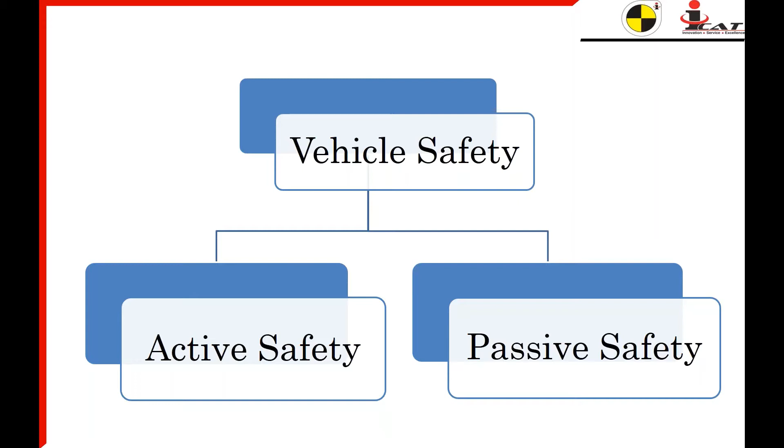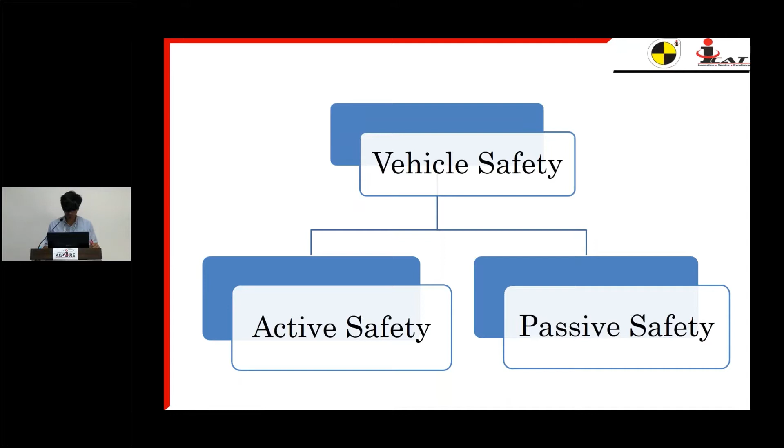Vehicle safety is a term we hear very often nowadays. What is vehicle safety? Anything which helps in increasing the safety of the vehicle or the occupant on road comes under vehicle safety. Vehicle safety can be broadly classified into two main groups: active safety and passive safety.

Active safety, as the name suggests, is anything which plays a role in avoiding the crash, avoiding the fatality to the occupant. So active safety technology prevents the vehicle from going into a crash scenario.

Active safety can further be classified into two parts: one category provides warning to the driver, and the other assists the driver.

Under providing warning to the driver, active safety features give information in the form of signals and warnings about the running vehicle status. A major technology developed and available in today's vehicles is TPMS, tire pressure monitoring system. It equips the driver about the current status of the tire, and in case of a flat, it cautions the driver to park the vehicle and do the necessary change.

Lane departure warning system is also a very important feature in today's vehicles, in which it warns the driver about any deviation in the lane the vehicle is traveling in.

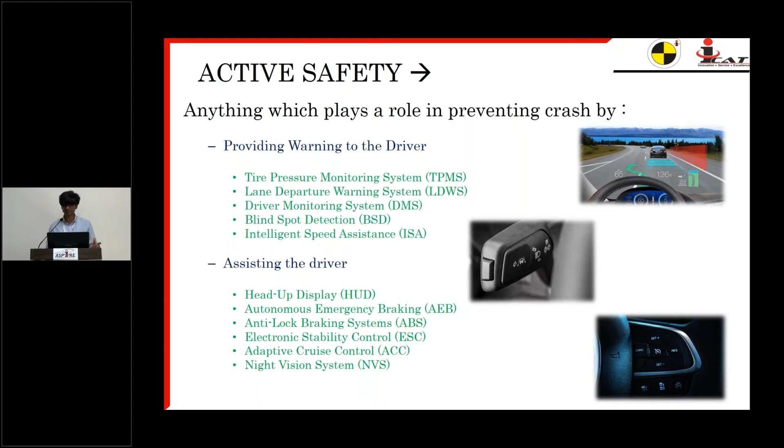Now, the other safety group we will focus on today is passive safety. Every system has its accuracy limits, so in case there is a crash and a casualty to the driver, there should be some system to avoid injuries, to minimize the injury or death. All those equipments and technologies which work in this direction come under passive safety.

Passive safety can also be divided into two parts: one which safeguards the vehicle occupants, the people sitting inside the vehicle, and the other the people outside the vehicle, the vulnerable road users, the pedestrians.

Under vehicle occupants, there are primarily four major technologies being used, namely airbags, seat belts, whiplash protection system, which helps in reducing neck injuries and whiplash injuries in the driver, and child safety systems. We are going to discuss this in detail in the following slides.

Under pedestrian safety, there are certain technologies available like pop-up bonnets and windshield airbags, which minimize the injuries caused to pedestrians.

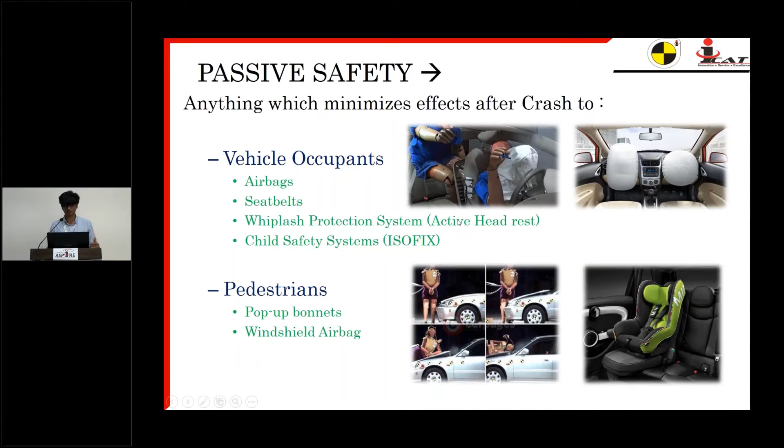The major elements of passive safety can be divided into the front and rear crumple zone, the main occupant cavity structure, airbags, front and rear seat belts, side impact bars which are useful in side crashes, and collapsible steering wheel.

Coming to the crumple zone. What is crumple zone? Earlier, the general perception of people was that the heavier and more rigid the car is, the safer it will be. But this is something which goes opposite in passive safety.

During a crash there is an impulse force which acts on the vehicle, and there is kinetic energy. The more the vehicle is able to dissipate the energy, the better the car will be. To dissipate the energy, physics says there should be more deformation and absorption of energy. The lesser the energy gets transferred to the occupant, the driver, the better the vehicle is in minimizing casualty. The structure which plays an important role in this is the front structure, the structure forward of the windshield, the firewall, and the bumper.

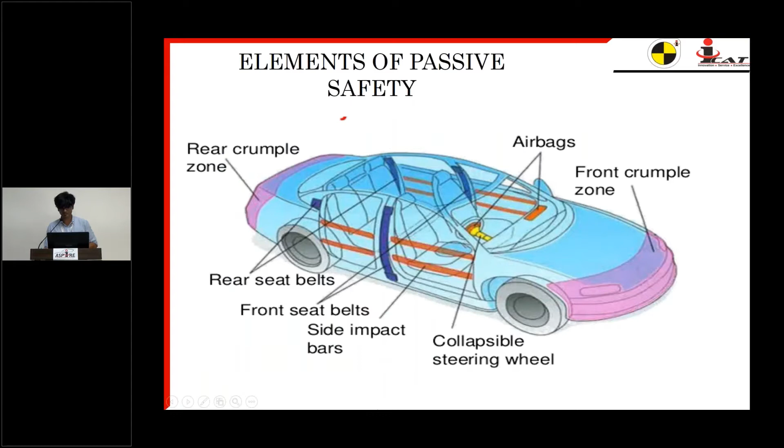Airbags, everyone of us have heard about airbags. Airbags are basically air cushions which come into picture during a crash. Airbags are also known as secondary restraint system. You must have seen in the vehicle there is generally an inscribed word on the dashboard as SRS. This SRS is nothing but secondary restraint system.

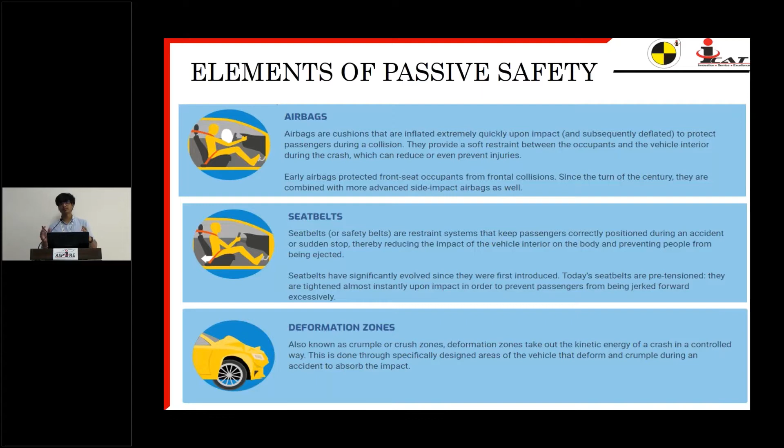Why is it secondary restraint system? Because this is generally not in direct contact with the occupant, whereas the seat belts are called primary restraint system because they are in direct contact with the occupant and control the motion of the occupant during the crash.

Let's go further into detail. There are different types of safety belts. Today I am only going to discuss the most common safety belts being used in the vehicle and the emerging technologies that are coming up in safety belts nowadays to prevent major injuries to the driver.

In today's vehicle, two types of belts are generally used. One is the 2-point belt, also known as lap belt, generally seen at the rear seat center occupant. This kind of belt restrains the driver only through the lower extremities, while the upper body of the occupant is still free under motion, so it has very minimal performance in avoiding injuries during a crash.

Another type of seat belt majorly used in today's vehicle is the 3-point safety belt. Coming to the technologies developed over the years in 3-point belts, there is the 3-point ELR, known as emergency locking retractor, which is the basic seat belt present in any vehicle or car.

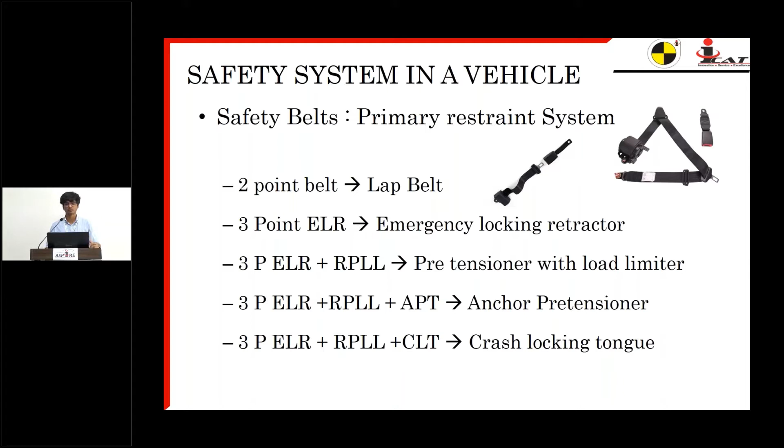Recently there was another development in seatbelt technology, CLT, crash locking tongue. So with ELR, load limiter, pre-tensioner, there is another component added in the tongue, which basically during the crash locks the webbing to prevent slip. So there is more efficient restraint of the occupant.

Coming to the airbags. As you know, currently in India, driver and passenger airbags have been made mandatory by the government, and every vehicle now being sold in India will have at least driver and passenger airbag. Other than these, there are different types of airbags which are available in the vehicle.

As you can see, a curtain airbag. This airbag generally helps to protect against injuries during a rollover or a sideways crash. It's basically located on the roof rail of the vehicle, and in case of a vehicle turnover, it protects the occupants and minimizes injuries.

Another type of airbag is the side airbag, also known as seat airbag or pelvic airbag. This airbag is generally located between the B pillar, the door, and the seat. During a side crash scenario, when the vehicle hits the car from the side, this airbag deploys and minimizes the forces being transferred from the door to the occupant's pelvis.

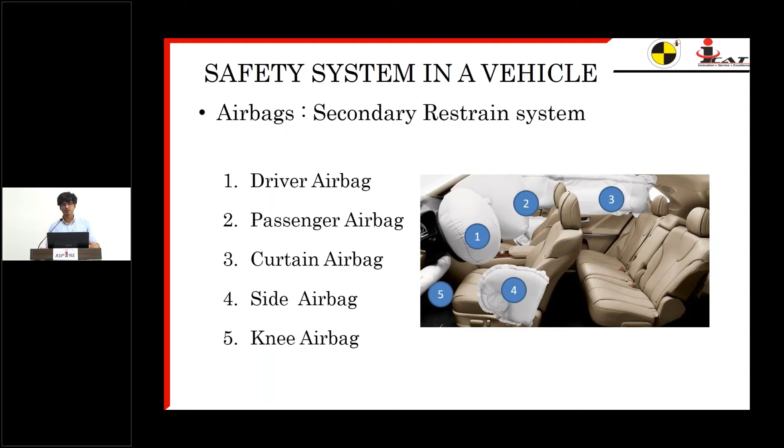Another one is the knee airbag. This airbag is generally used in frontal crashes when the occupant's legs hit the dashboard or the steering wheel, causing a certain amount of injuries. So this airbag basically prevents those injuries.

So now, having discussed the major elements of passive safety, what is the objective of the crash test basically? Why do we do crash tests? Crash tests are generally done, first of all, of course, to make a safe product, a safe vehicle, and for injury reduction.

There has been a constant series of crash tests done on vehicles to come up with new, better designs, better ideas, and ways to minimize injuries. Performance rating: you all must have seen nowadays there has been talk about vehicle star ratings, 1 star, 2 star, 5 star. All those performance ratings are done based on crash tests performed inside the lab, and of course benchmarking. Different OEMs perform crash tests to see where their vehicle stands in terms of crash worthiness, and how they can compete with other existing vehicles.

A crash test is done inside a lab within a controlled environment to simulate on-road conditions. Since everything is controlled and inside a lab, test results are more repeatable, so you can validate your design in a better way.

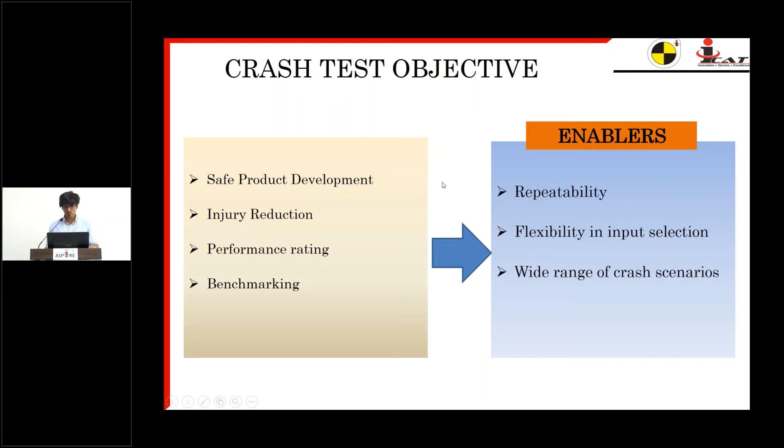Now coming to the crash test facility. Before going further, I would like to show you some crash test videos so that you can relate to the crash test facility more closely.

Can you help me with the video?

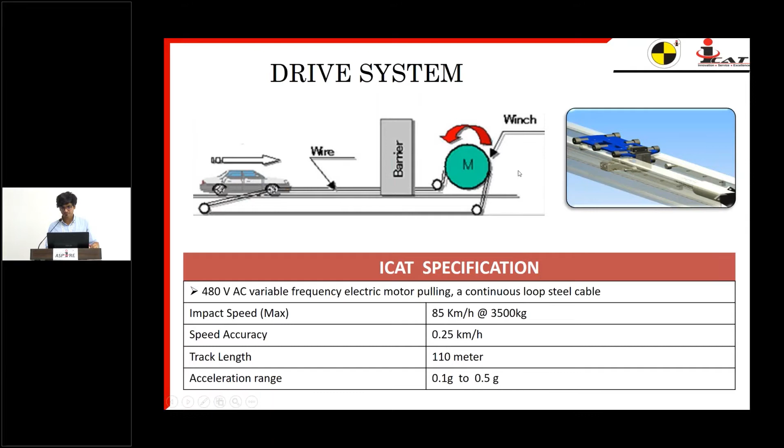Coming on to the second element, the crash barrier.

Barriers are a very important part of a crash test, because a barrier basically represents a second vehicle. There is a test vehicle which we test against a barrier, but if you transfer it onto the on-road condition, a barrier generally represents the other vehicle with which the test vehicle is being crashed.

There are generally two major categories of barriers: one is the rigid or fixed barriers, and the other is the moving barriers. I will explain each barrier one by one, starting from the rigid concrete barrier.

This barrier is generally used in full frontal crash. This concrete barrier weighs around 70,000 kg. The full face of the vehicle gets impacted onto the barrier during a full frontal crash test.

On the right side is the offset deformable barrier, the ODB. This is generally the most common barrier used during the frontal offset crash. What 40% offset means is that the barrier is aligned with an offset from the center of the vehicle. Basically, offset is nothing but the portion of the vehicle which will overlap the barrier during the crash.

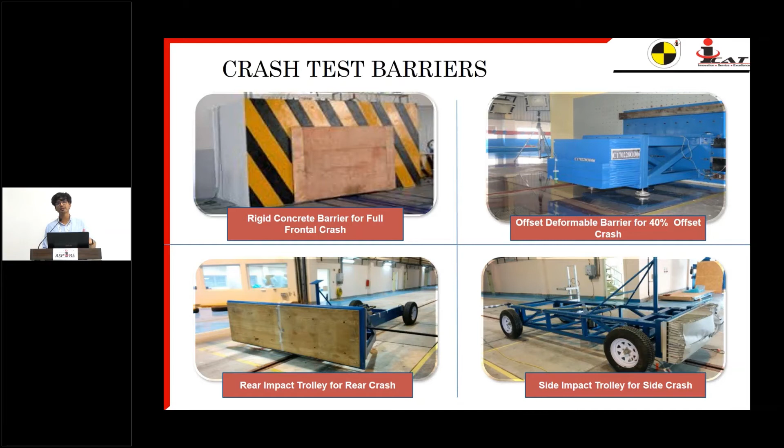These other barriers are more of a development test. A vehicle OEM, if it wants to make the vehicle extra safe, generally performs different kinds of tests. In case of frontal pole, a pole generally simulates a tree. In highway conditions, there are trees or poles on each side of the road, so to simulate a crash with those objects, this frontal pole test barrier is used.

Similarly, there can be a side pole crash test. These pole tests are also included in consumer group tests, also known as NCAP tests, New Car Assessment Program. We'll just touch upon it in our following slides.

Then there is a 30-degree angular barrier, in which the barrier is aligned at an angle of 30 degrees from the oncoming vehicle. Then there is the underride barrier.

This barrier is generally used to simulate a condition in which the car hits a truck or a goods carrying vehicle. These types of barriers, the crash test is generally used to test the performance of a RUPD, the rear underrun protection device installed on the truck, in which a passenger car may come speeding and hit it from behind.

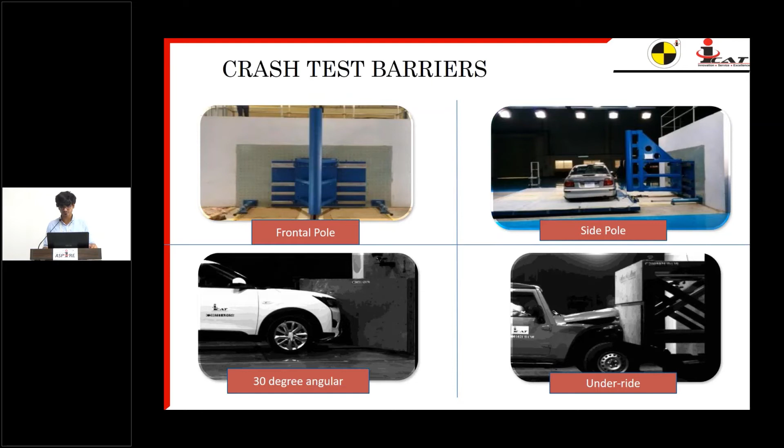Now coming on to the third element: video and the lighting system. During any crash test, it is generally a matter of seconds. A typical crash takes around 80 to 150 milliseconds to complete. Such a small amount of time cannot be witnessed by the naked human eye, so in order to see, evaluate, and analyze the crash event after the test, high-speed cameras are used.

I would just like to share something on this. A normal video which we all see on TV, television, or a movie is played at 30 FPS, which is 30 frames per second.

Any series of photos or pictures played at 30 FPS will appear to be a moving video to a human eye. In a crash test, the cameras used for video recording operate at 1000 FPS, 2000 FPS, or even 5000 FPS in case of airbags. This means a camera will capture 1000 frames in 1 second. These are very costly cameras, and the shutter has to open and close 1000 times in a second, which demands a very large amount of light to be captured by the camera.

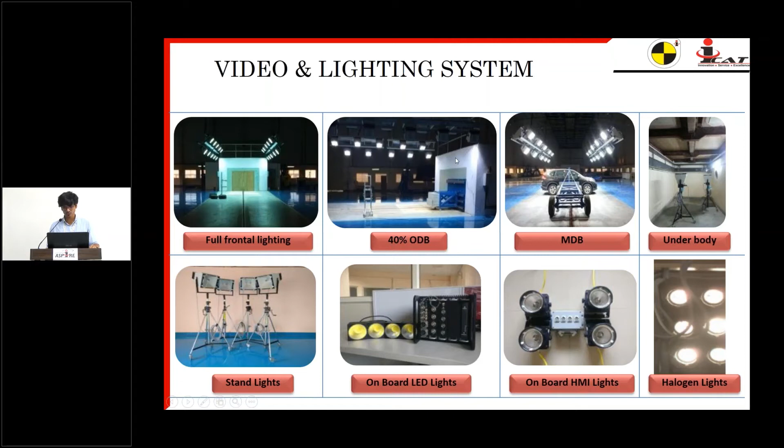Now coming to the fourth element, which is instrumentation for capturing data. A crash test in a lab is nothing but a way to check the performance of the vehicle. In order to check the performance, you need to have data. Without data, a crash test would mean nothing - it is just equivalent to an on-road crash.

In order to capture as much data as possible from a crash test - because it is a very costly test, not a small one, it generally involves a complete vehicle getting destroyed, and it's a one-time test. You cannot repeat it, you cannot redo it, you cannot undo it. Considering such criticality, specialized instrumentation was developed for use in crash tests.

Some of the instrumentation involved in a crash: the first is the data acquisition system. DAS, or DAQ, is nothing but a multimeter. During a crash, various sensors are used which provide voltages, and the output of the data is in volts. DAS is a very precise multimeter capable of absorbing the shock during a crash and capturing data at 20 kilohertz - that's 20,000 samples in a second. It's a very sophisticated device with a number of channels. Generally, a DAS available in ICAT has 32 channels, meaning 32 different sensors' data can be captured at once at 20,000 hertz frequency.

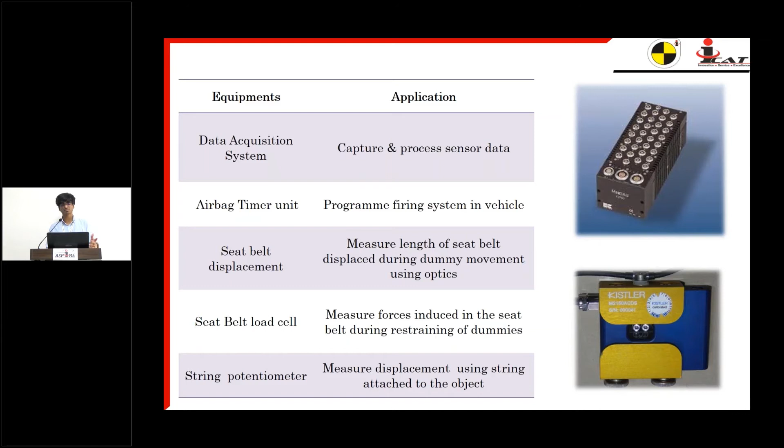Then there is a string potentiometer, which is nothing but used to measure the displacement. In a typical crash test, there are just three physical quantities we are focused on: one is force, the other is acceleration, and the third is displacement. Accordingly, the most commonly used sensors are related to the measurement of force, which is the load cell, displacement, which are potentiometers or displacement sensors, and the third is accelerometers, which measure accelerations.

Similarly, you can see the other instrumentation used in crashes, like pressure sensors to measure the pressure on the surface, then accelerometers. The accelerometer is, I would say, the most important sensor during a crash because it measures the acceleration at a local point. These are small sensors which can be mounted in many different locations on the vehicle, such as the frontal structure, the seats, the doors, the dash, the IP, engine block, anywhere. So the accelerometer gives you individual acceleration acting onto that particular location of the vehicle during a crash.

Then there are temperature sensors, gyroscopes to measure the angular velocity or angular motion during a crash. Basically, the driver's head or passenger's head during a crash does not follow a linear path, but rotates - it follows an angular trajectory. To measure that, a gyroscope is generally placed inside the skull of the dummy.

Then there is a 2D video tracking software which is used to analyze the displacement or velocity of the vehicle. How it works is you put some known markers on the vehicle, and using tracking software, you basically track the parameters on the software.

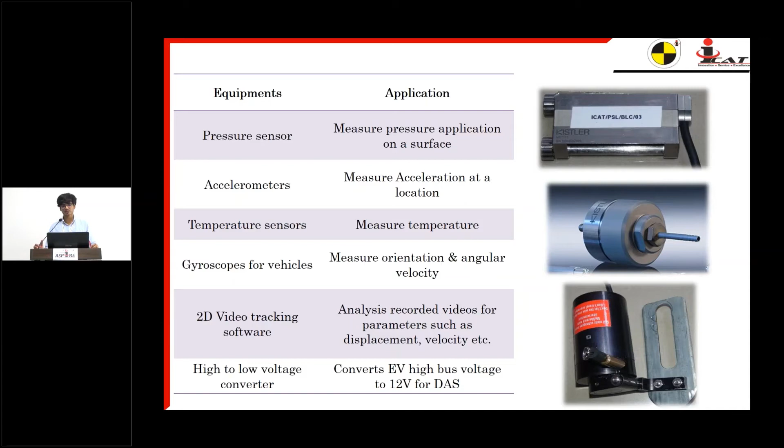Then there is one important equipment used in electric vehicles: the high to low voltage converter. Generally all EVs consist of very high voltages of around 500 to 600 volts, but all this electronics works on 12 volt DC. So in order to capture that high voltage and transfer it to these instrumentations, a high to low voltage converter is used in EV crash tests.

Now coming to the dummies. All this instrumentation we just discussed is used inside the dummies, and of course inside the vehicle. Crash test dummies can be classified into different groups based on gender, based on percentile, and of course based on application. Considering the application, dummies can be classified into frontal impact dummies, rear impact dummies, and side impact dummies.

Based on gender, a dummy can be classified into a male dummy, a female dummy, or a child dummy. And based on percentile, dummies are classified into 5th percentile, 50th percentile, or 95th percentile. Percentile is nothing but the amount of population that particular dummy represents. So a 95th percentile dummy will have parameters or characteristics like body mass, height, and weight which cover 95% of the population.

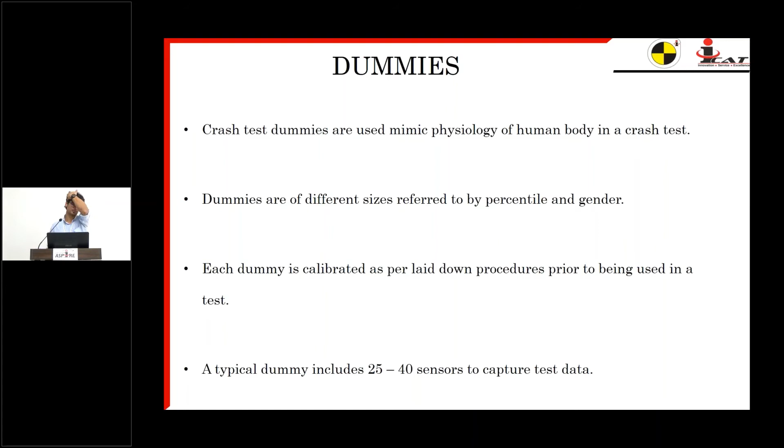So here is just a brief history of a crash test dummy. The first crash test dummy was developed in 1949 by the name Sierra Sam, which was particularly developed to test the aircraft in the aircraft industry, to test the pilot ejection seats and the pilot restraints.

Soon after there was more development, and in 1968 Sam Alderson introduced the VIP series of the dummy. This VIP series of dummy was specially designed for the automotive sector, which we nowadays use in car crash tests. Then 3 years after, in 1971, the first hybrid one was introduced by GM.

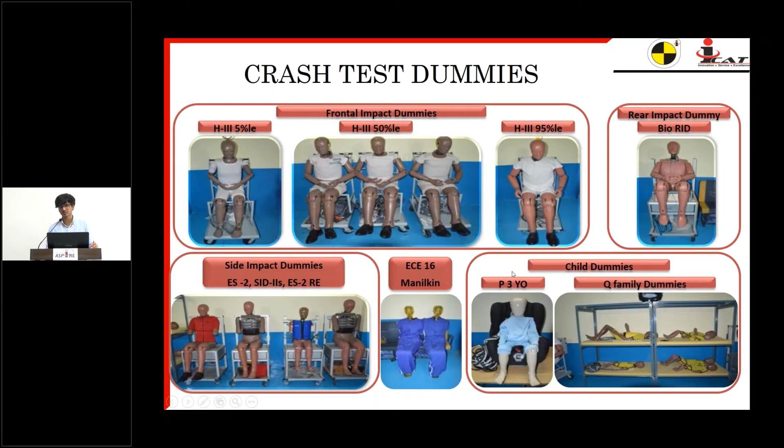Then there was developments. Hybrid 2 came, hybrid 3 came in 1976. So the dummies which you can see on your screen are all hybrid 3 series. Presently all the regulatory tests involve the use of hybrid 3 series dummies.

And the latest dummy, known as the Thor dummy, test device for human occupant restraint, had its first prototype started in 1995 and it got completed in 2018. So you can see it's almost more than 20 years which it took to develop the Thor dummy.

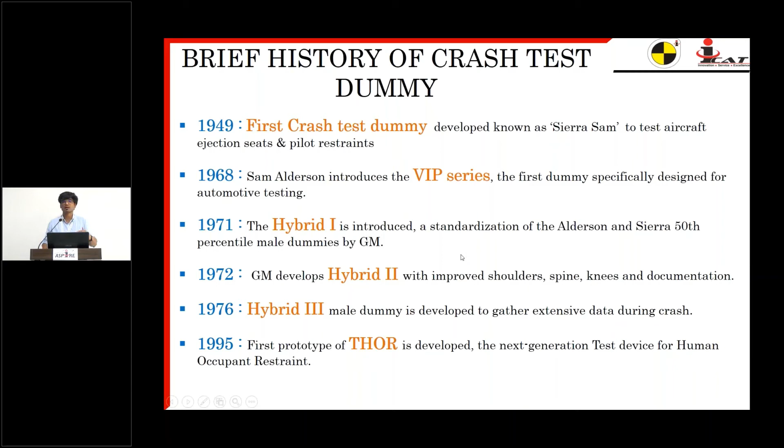So one question might arise: how do these dummies differ from the previous generation? Generally it's a quest for 100% simulation of a human body. Of course, our human body is quite flexible, and unlike the dummy used in the crash test, a Thor dummy would more closely replicate the human body in terms of neck movement, spine characteristics, and hand motion. The more advanced the dummy, the more closely it will replicate the human body, and the more the replication, the more closely you can rely on the crash test results.

So generally, talking about dummy instrumentation, as I told, there are three physical quantities: force, displacement, and acceleration. So for each type of parameter, specific instrumentation is used.

The accelerometers, you can see a uniaxial accelerometer. It's very small in size, and hundreds, even 200s of them can be used in a single crash test to capture acceleration throughout the vehicle body. Then the load cells.

So talking about accelerometers, various body parts experience different physical quantities during a crash. Just try to imagine during a crash, the head would face the maximum acceleration.

During this motion, due to momentum, the physical parameter which will mostly affect the head is acceleration. There will not be displacement, there will be no force on it unless and until it strikes the steering wheel, but the parameter which will act is the acceleration. And due to that acceleration, the injury which it will cause is related to the fluid.

Generally a human skull has fluid in which the brain is stored. Due to this sudden acceleration, there are chances of injury due to fluid displacement. That's why we use accelerometers in the head to measure acceleration, and the same is the criteria which is set for evaluating the performance of a vehicle.

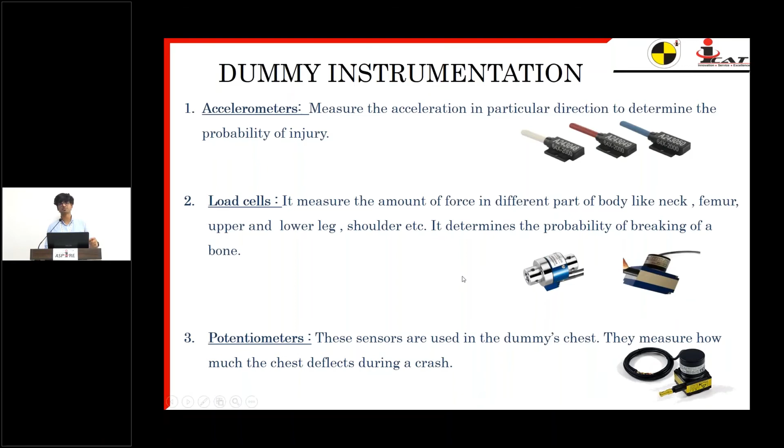Coming on to the chest, as I discussed previously, there will be a compressive force from the belt and the steering wheel. It was observed that the major injury caused in the chest was not due to force or acceleration, but due to compression. The ribs, a human rib, can only sustain a certain amount of compression, and to evaluate that, a displacement sensor is used inside the chest to measure the displacement. Potentiometers, as you can see, measure displacement using a string at a particular body part.

As I told, someone might think: why was only acceleration kept in the head and only displacement kept in the chest?

So all this data was first studied and was based on the actual crash scenarios. Over the years, based on the causes of critical injuries on road, these parameters have been defined.

To evaluate the vehicle. Having said that, it is not that, suppose coming to head performance criteria, as per regulation it should be less than 1000. So 1000 is a unitless number. But what if one vehicle has HPC at 998 and another vehicle has HPC at 1005? Do you really think the vehicle at 998 will be safe and 1005 will be unsafe? No, of course not.

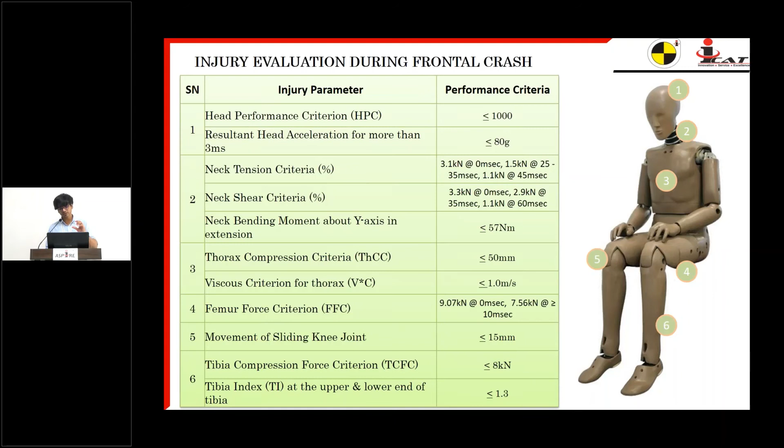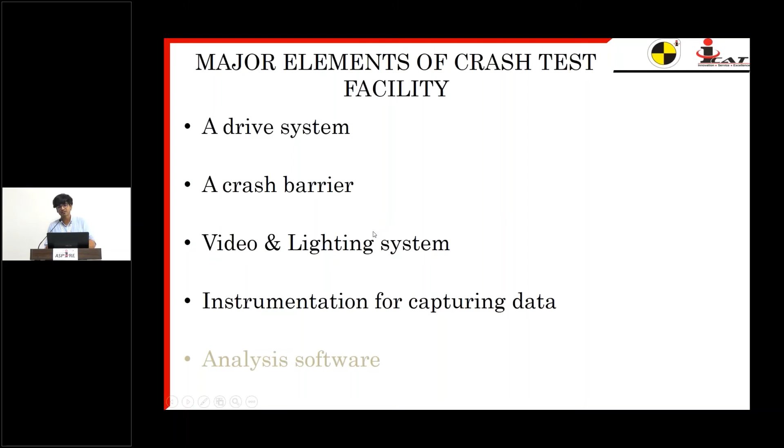Okay, so all these things which I explained are done after the crash — it's all post-test crash analysis. For this you need dedicated software to calculate all these injuries. There are two kinds of software used. One is the tracking software — as you can see, there are markers pasted, so it's more of a visual software in which, if you want to calculate how much the A pillar or a particular B pillar or the steering wheel displaced during a crash, you can track it afterwards using this tracking software. The other kind of software is injury calculation, which gathers all the information from the sensors using a DAS, and then predefined formulas are imposed onto that data, and injuries are calculated.

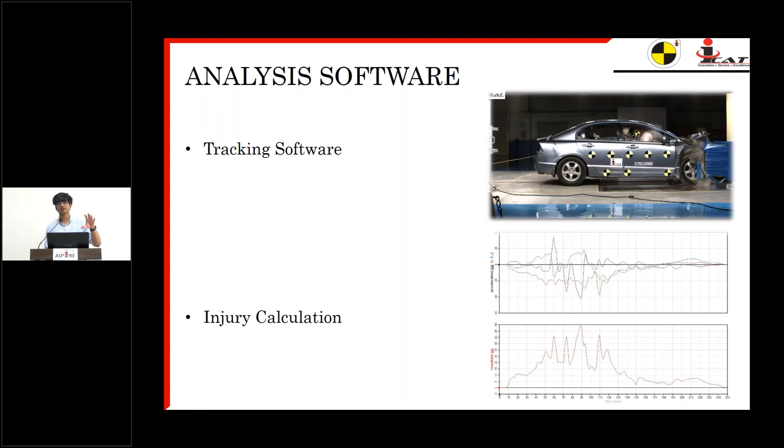So that was majorly about the crash test facility. Now we will just briefly discuss the types of crash tests which are done.

Full frontal crash test is basically a vehicle being crashed onto a flat concrete barrier with the full face of the vehicle impacting the surface. This kind of test is generally used to check the steering displacement, how much the front structure is capable of holding the forces, and how much the steering would displace inside the occupant zone. More the displacement, less efficient the vehicle, because there are more chances of the occupant being injured.

Second is the side impact. Side impact is nothing but a case where the vehicle is hit from the sideways.

Then side oblique pole, as I showed you during the barrier, is nothing but the vehicle hitting the pole at an angle instead of perpendicular.

Then 30-degree angular is the frontal crash test, hitting the barrier at a 30-degree angle. 40% offset, which is also one of the regulatory tests, is a frontal crash test where the vehicle overlaps the barrier by 40%.

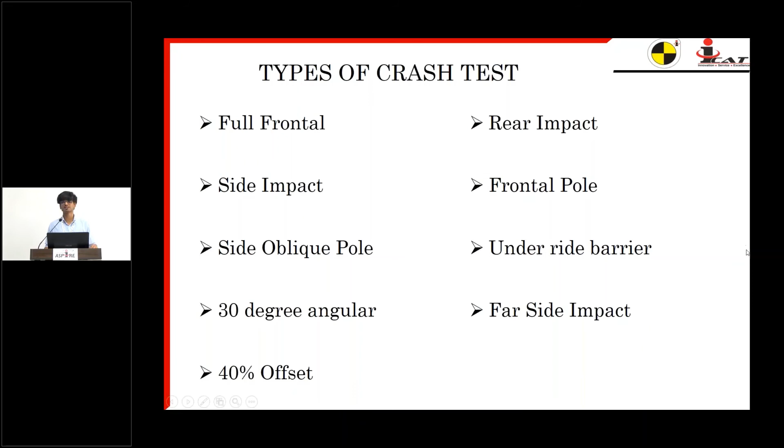I would just emphasize on a component level test like the pedestrian test. In pedestrian testing, we test the head form and the leg form as per AIS 100. All these regulations are available on the ICAT website, you can have a look. It will give you an idea of how test preparation is done, what factors are considered during test preparation, how test results are analyzed, and give you a better picture.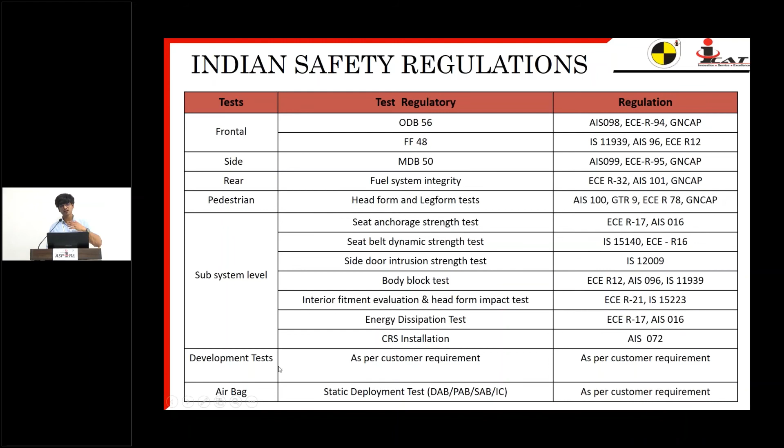Then there is the airbag test at the component level, in which the airbag is deployed to check its deployment time, its deployment shape, how it deploys, and whether the unfolding of the airbag is in the right manner.

I have already discussed the injuries. Other than injuries, there are certain physical performance checks after a crash test on a vehicle, such as fuel system integrity. These performance checks exist because there can be numerous checks, but all these regulations have been designed considering past data on which factors caused maximum casualties. Those critical parameters were captured, and it is ensured that they do not cross the regulatory limits.

For fuel system integrity, it was observed that after a crash, although the vehicle was safe and the occupant remained safe, fuel system failure caused a fuel leakage which caught fire, resulting in casualty. So it is ensured that after the crash, the vehicle's fuel system remains intact with no leakage.

Then there's occupant rescue. It might be the case that the occupant is safe due to airbags and the structural design of the vehicle, but after the crash, the occupant could not evacuate the vehicle and died due to suffocation. So under occupant rescue, it is ensured that after the crash, at least one door in each row can be opened.

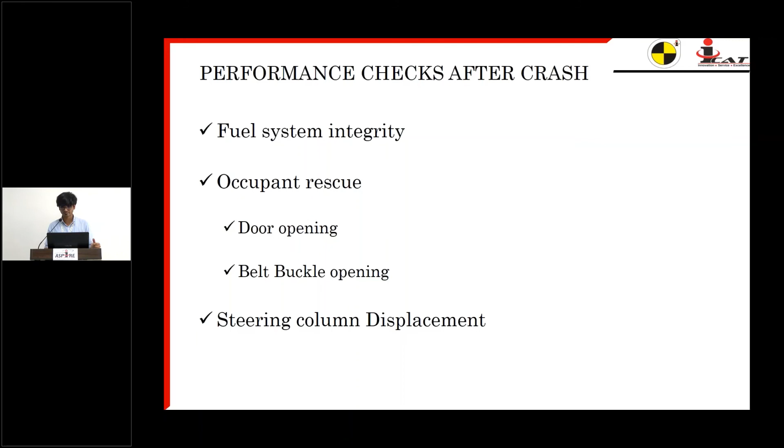That was about the basic regulatory tests that each manufacturer in each country has to meet. There are certain advanced tests known as consumer group tests, which you must have come across in media, where a certain vehicle is rated 4-star or 5-star. There is a consumer body known as NCAP, which takes a vehicle from the market and tests it under more severe conditions. For example, in India the frontal crash is conducted at 56 km/h, but in a consumer group test the vehicle is tested at 64 km/h.

There are additional requirements that generally reflect what happens in real road crashes. Based on geography or region, NCAP has been divided into further bodies like ANCAP, Australian NCAP, ASEAN NCAP, Latin NCAP, Euro NCAP, Japanese NCAP, and in order to standardize requirements, a body was formed known as Global NCAP.

Euro NCAP is the most advanced NCAP, currently using the Thor dummy, the most advanced dummy, and it even evaluates vehicle performance based on ADAS active safety features. Some less developed countries might not be able to meet those requirements. So each country has its own NCAP protocol with its own requirements, but there is a standard body, Global NCAP, which considers the overall scenario and keeps requirements at a nominal level so that each manufacturer can meet it across all regions.

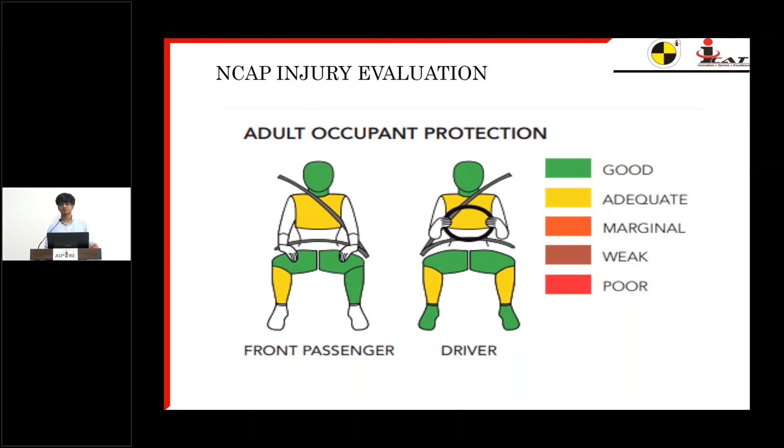This is generally a representation of the color coding scheme for NCAP injury criteria. If the region is green, on the NCAP website you can check the rating of a particular car, and this diagram is generally given there. Green means it's good, and red means poor. This color coded diagram is just for an easy representation of how the injuries are there.

And what does the star rating mean? This is nothing but a normal scale based on some points. Stars are given, and overall, if you generalize it, a 5-star vehicle means the chances of serious injuries will be less than 10%.

As I told, nothing is sure. It is all probability and based on the on-road condition. Any vehicle which meets the crash in a laboratory, but on road there might be number of noise factors, number of variables, number of independent variables which might affect the results. So a 5-star rating will mean the vehicle has a probability of protecting the occupant and restricting severe injuries in 10% of the cases. A 4-star will have a chance of 20% of serious injuries. Similarly, a 1-star vehicle will have a chance of 46% or greater serious injuries caused to the occupant.

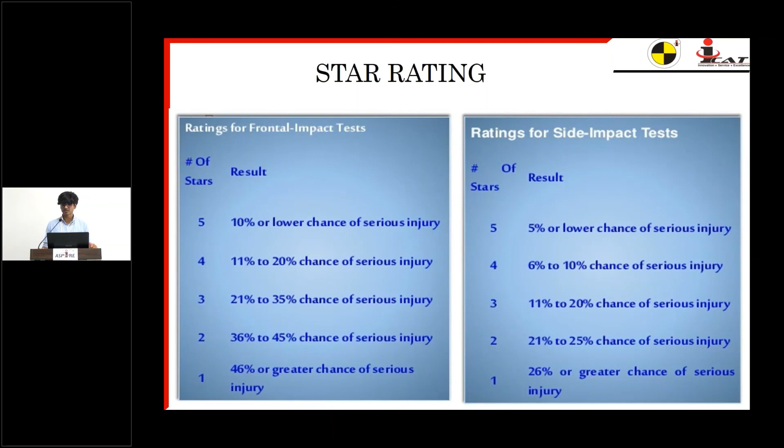Similarly, there is a chart for the side impact test in which 5-star means 5% and lower, and a 1-star vehicle will have a chance of 26% or greater for serious injuries.

Well, that was it for today. Thank you so much all for your attention. In case of any questions.

There is a question from Mr. Ganesh: In India, which safety crash test is mandatory as of today? Currently in India, there are 3 crash tests which are mandatory. One is the 40% offset as per AIS 98. I would just go to that slide. Then there is a side impact MDB 50 as per AIS 99, and a full frontal test as per IS 11939. So you can broadly say there are 3 crash tests which are currently mandatory for Indian manufacturers.